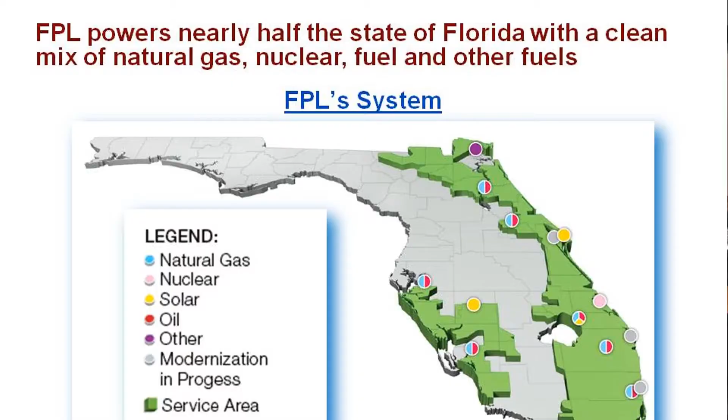As you can see, there's about $62 billion in assets, about 4.6 million customers in the state of Florida. On the NextEra side, we have been predominantly building a lot of wind and taking advantage of the production tax credits, which almost expired this year, but the House and the Senate were able to come together and extend them. On Florida, what you see here is basically we go all the way to Jacksonville—it's about 4.6 million customers, and that's about 52% of the state.

Now, what's misleading is that you'll see oil on some of these. Basically, the only oil that we use—and we have reduced our oil consumption by 98%—is backup oil in the event of a curtailment in natural gas pipelines. It's a 3-day backup supply that we have at each of our natural gas facilities. That's the only oil; we don't use any foreign oil, we've weaned off all foreign oil. If every utility in the United States weaned off foreign oil, the emission reduction in this country would be paramount to nothing you've ever seen before.

You can see some of the solar—we had 3 solar projects that we built. When we talk about modernizations, basically that's taking the existing infrastructure we have in a location. For example, we'll talk about 3 of them: Cape Canaveral, Riviera, and Port Everglades. You take the existing transmission, the existing water, the existing land, and basically modernize—take out the existing technology, put in new technology. So we took those plants from oil to natural gas, and the savings to our customers are unbelievable. Not only that, the heat rate reduction is about 40%, and there's about an 88% reduction in emissions. It's an amazing story—we'll talk about those.

This is NextEra—you can see most of the assets are scattered, actually from Canada all the way to Texas; this is really the wind hub in the United States, where the wind really blows all the time, so you can see where we chase most of our wind assets. Then we've got nuclear plants: Seabrook up in New Hampshire, a nuclear plant in Iowa, and a nuclear plant in Wisconsin. We've diversified a lot into renewables. Most of these states have renewable energy policies we've been able to take advantage of, and in most of them you also have a deregulated utility market where the utilities don't want to be in the generation business, so it allows us to go in—not as a utility, but as a wholesale generator—and sell power. Most recently, we have set up offices in Houston and Austin, Texas, where we are expanding fairly significantly into the natural gas infrastructure, both on the storage and on the transportation side.

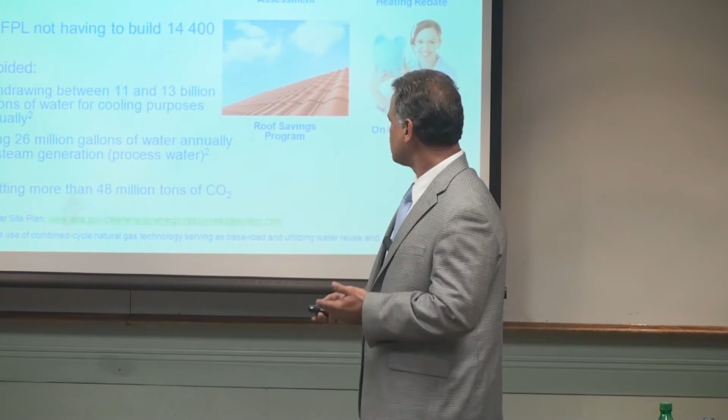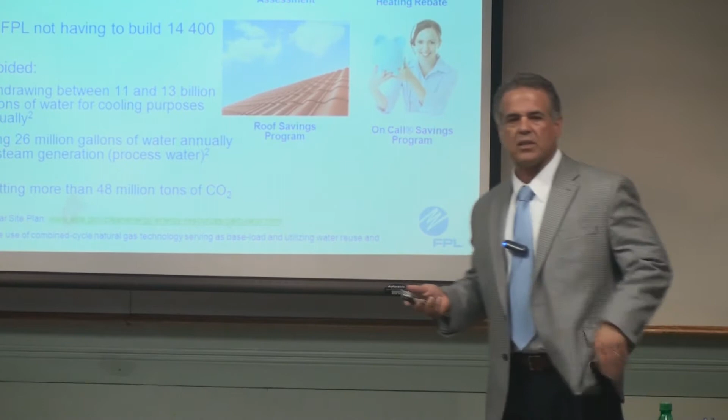We've also got a fairly aggressive energy efficiency program. You can see the megawatt hours, that's a lot of megawatt hours. Basically, that has allowed us to avoid building a number of power plants. So the more we continue to pursue energy efficiency programs with the state and regulators, the more we'll continue to avoid having to invest capital in some of these assets.

Oops, let me see if I can play this. Can I play this, Elena, right here? I'll try to get this video. I don't know, you had the magic earlier.

This is a new campaign. FPL has never been very aggressive when it comes to campaign marketing and being out in the public. We've got a dynamic new president, Eric Silagy, and we've had a lot of new changes at FPL at the top. What we've been doing is beginning to promote our story, and we have a fairly good story. So this is what you're going to be seeing on TV now.

The sun is shining, the energy's high, and here at FPL, we can't wait to get started, because today we get to make a difference. Today we get to help take on the day and make changes for the better. Because for us, it's not about doing what's convenient, it's about doing what's right. A promise that all of us are dedicated to every day. Working around the clock to be there when we're needed just a little, and to be there when we're needed the most. That's why we're reducing our dependence on foreign oil, making the grid stronger and smarter, tearing down inefficient plants, and building cleaner, more efficient ones that run on US-produced natural gas. All to keep bringing you the most reliable energy and the lowest bill in the state. At FPL, we're changing Florida's energy today to create a better tomorrow for all of us. At FPL, we're changing the current.

That's our new thing, changing the current. So it's pretty cool, that's the 30-second version. There's also a 60-second version, so I figured I'd spare you the extra 30 seconds. But we're real proud of what's going on here.

We're growing a lot, but by the same token, through our investments we've been able to keep our costs down as the lowest cost. What's interesting is that, second to, I think, GE, FPL actually had some of the largest capital infusions over the last decade. We've invested over $10 billion while the economy has been in a very poor state.

So it's allowed us to basically tell the story that investing capital in new technology and future technology is what allowed us to keep our costs down. The no-brainer of that is, in this case, for example, we invested a lot in clean natural gas plants, which saves our customers for each plant about $500 million over the life of these assets on an NPV basis.

So we're continuing to invest. We believe in continuing to be aggressive on the investment side. And what makes sense is, as long as we continue to invest in prudent investment, it keeps the cost to our consumers low. Now, we've really been the only company in the state that's been doing these investments. TECO hasn't, Southern hasn't, and now what you're seeing is TECO has issues with their coal plants. They're going to have to eliminate some of this stuff. Progress has issues with coal plants, so they're looking to get into the whole natural gas phenomenon. So we wish them well.

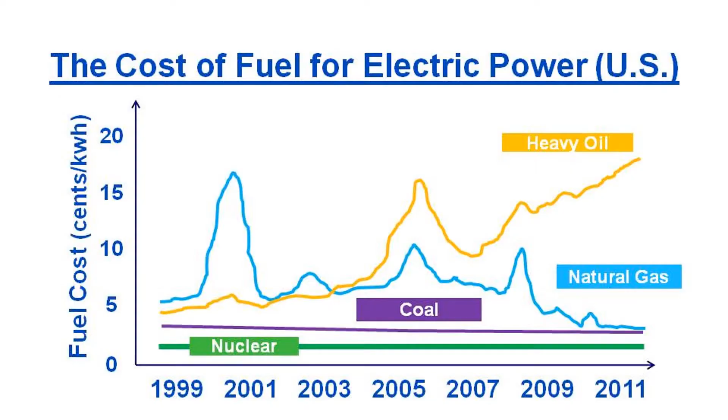So there's a lot of debate about the cost of fuel and what's going on in this country. What's interesting about this graph is that most people, especially the media, give nuclear a very bad name. But when you take a look at the cost of nuclear over the life of a project, this is on a levelized cost of electricity, so you're basically NPVing the cost over 30 years. That factors in the capital investment as well as the fuel. So the beauty of nuclear is, yes, it's a very exhaustive, very expensive process to actually get sited and permitted.

You spend about $150 million just on the application. The federal government charges you $150 million just on the nuclear application. And then it's about a 10-year process to get yourself licensed and ready to go, with a lot of opposition, as we've been facing in South Miami. We've had a lot of issues related to the transmission corridor. But when you look at it purely on the economics, you can see nuclear still makes a lot of sense.

Coal is still cheap. The issue with coal is I don't think you'll see a coal plant sited. If you wanted to get a coal plant sited in Florida, I don't think it would happen, at least in my lifetime, it wouldn't happen. So even though the costs are low for those that are currently generating, I think what you're going to see in coal is, one, a carbon tax that will ultimately come. No doubt it's coming. And I think at some point you're going to see a water tax, because water is going to be the next carbon.

When you have states such as Georgia and Alabama that went through incredible floods and incredible droughts, part of the issue is there's no means to transport water from those heavy drought areas to the areas that are abundant in water. So you're going to start to see more and more emphasis on water. Part of the reason I like that is because it'll allow solar to become a much more natural play for us, and we'll talk a little bit about solar.

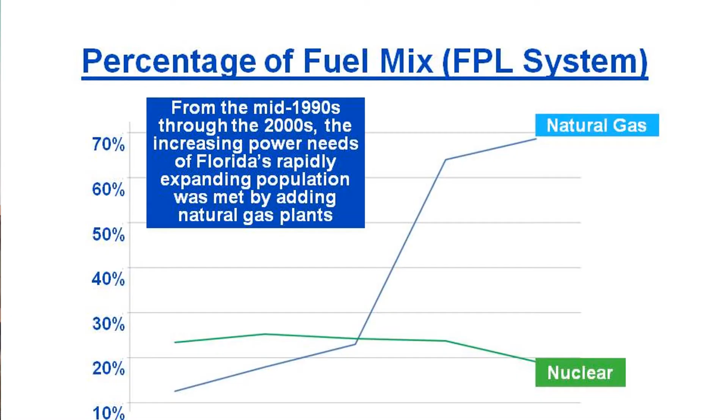Okay, so here's what's going on at FPL. I got great news and some not so great news. The good news is we've been able to keep the rates low. Your rates today are actually lower than they were 10 years ago. And the reason for that is, one, we've been managing our O&M very prudently, but 50% of your bill is also fuel, and we've been able to invest in natural gas assets and convert to natural gas assets. So when you take a look at your bill, you're basically paying about $94.60 for 1,000 kilowatt hours. That's a pretty good deal.

So our commitment is to continue to be able to provide that service to you. That comes because natural gas prices have been basically as low as they are. Had they continued to be $10, $14, your bills would be a lot more expensive, and we'd be looking to do something other than natural gas. So we're about 78% now natural gas in the state. So the good news is it's clean, it's reliable, it's very affordable.

The bad news is you don't want to put all your eggs in one basket. Right now we have two pipelines that feed the whole state of Florida. Both of them come from the Gulf of Mexico. So a bad hurricane, a curtailment, or God forbid a terrorist act, and then the state of Florida is in a brownout, basically rolling brownouts. So we've got about 16% nuclear. We're continuing with our nuclear efforts, but it's a much longer process.

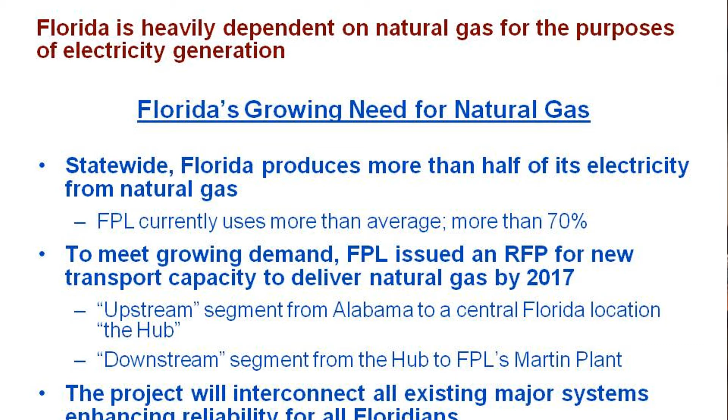So this is what's going on. We have aggressively now been pursuing a 3rd pipeline because our gas needs and the state's gas needs continue to grow. This is a pipeline that would basically originate at what we call Transco 85, which is in Alabama. And that natural gas would flow through the center of the state, not be reliant on the Gulf of Mexico. So basically we're not so much trying to diversify our fuel mix, we're trying to diversify the supply, so the supply in this case is really the assets, the pipeline. And we're pushing hard. Right now we're in the middle of an RFP. We're evaluating, we should be awarding an RFP sometime in June or July.

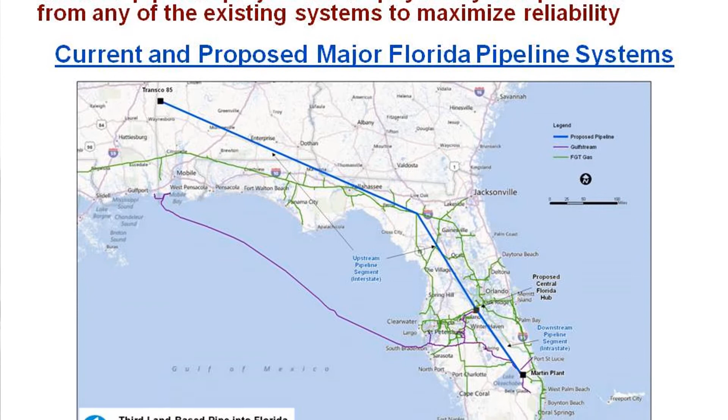And this is where you can see, you see at Transco 85 in Alabama, that blue line would be the pipeline. And it would serve up to a hub in Orlando. Our interest is to basically take that hub from here to here, and anybody else can manage or own the other hub. But it won't just service FPL, it'll service other utilities in the state of Florida. So the beauty of this is it also creates an enormous amount of economic development for the state. It's bazillions of dollars in taxes and obviously a lot of jobs and job creation. So it's a heck of an economic development play also.

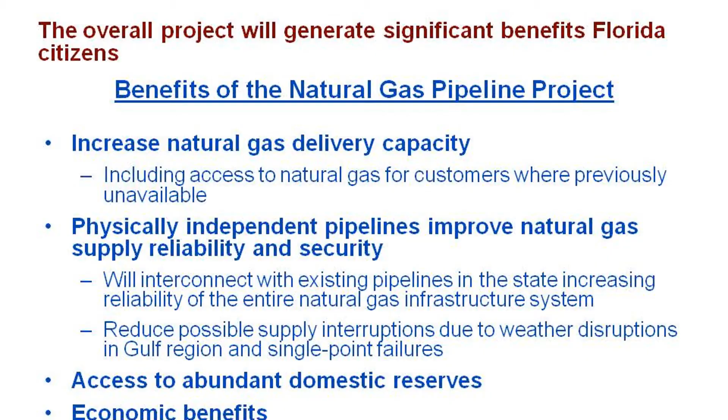So I think we've covered some of this, but obviously the benefit here is the more you can increase natural supply. Florida doesn't have indigenous natural gas, coal, or oil. The only thing we really have here is the sun. So we are constantly paying other states to supply us. We are the largest purchaser and consumer of natural gas in the United States. We, FPL, not NextEra, purchase about $5 billion every year of natural gas, and not one penny stays in the state of Florida. It all goes to Texas, and Rick Perry's very happy. It goes to Louisiana.

Bobby Jindal's very happy too. We just had Rick Perry here with Rick Scott, jostling back and forth on the economics. Texas has the number 1 economy, and Florida has now moved up to the number 3 economy. So when the media tells you all the bad things about Florida, let me tell you, Florida is actually doing very well. Our 4th graders here just ranked number 1 in the United States, and number 2 in the world, second to Finland. So there's a lot of very positive things happening here on the economic side.

Florida is open for business now. We've got a tremendous story on unemployment. When the governor took office, it was about 12.4% unemployment. We're down to 7.6%. It's a great story, and we're continuing to grow. I think we're going to see continued growth because, at the end of the day, who doesn't want to be in paradise? Would you rather be in Texas, where it's hot or cold or hot? Or you want to be in Florida? You've got beaches, you've got sunshine, and you've got the U.

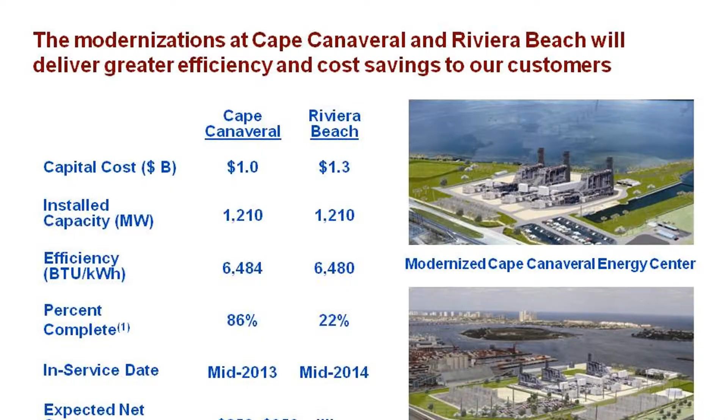That hurts me to say that, but we used to play against the U a lot.

So these are the modernizations. This is what these natural gas plants look like.

But here's, you remember those big old stacks you see on the highways, 350-foot stacks? Some people hate them, most people hate them, some people like them. Well anyway, at Cape Canaveral we blew up the old plant a couple years ago. We actually demolished the plant, and this new plant is going commercial now. I think in June of 2013, Cape Canaveral will be going commercial. The beauty of that is we spent $1 billion for 1,210 megawatts. That's less than $1 a watt.

That's phenomenal. When you look at solar today, residential solar is going for about $6 a watt. Utility scale solar is going for about $2.50 a watt. For that $2.50 a watt, you get 20% capacity, meaning you get sun and energy for 20% of the time. When you do it on a natural gas plant, it's 90 to 100% of the time. That's the difference between the two, and that's why the levelized cost of electricity is a lot lower with gas.

Now, when you look at the efficiencies, for all the engineers in the room, these old plants were about 10,000 heat rates that we replaced with about 6,400 heat rates. What that means is you're burning about 33% less gas in this case, which is about a $500 to $700 million savings over the life of the asset to your customers. So when you take these two together, it's over $1 billion in savings. That's what allows us to keep our costs down.

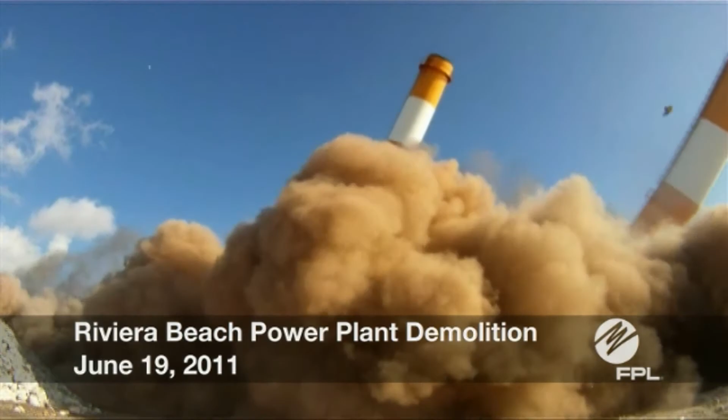That took a year of planning. We blew it up in 7 seconds. For 1 year, we had every structural engineer and civil engineer looking at these assets. Keep in mind, there's $1 billion worth of transmission at these sites. You've got Intracoastal, port authorities, Coast Guard, Homeland Security. We had to coordinate with a ton of people.

When we did Riviera, because it was right on the Intracoastal, it was really neat. I got to play media boy that day. So at 5:30 in the morning on Father's Day, we were at the top of the Port of Palm Beach building, looking down. It was pitch black, but that's FPL. We were there very early. The boom was going to be at 8:30 in the morning.

At 6:30, I could look at Peanut Island across, and people were camping in their tents, just waking up. The media got there about 6, and every 5 minutes they would ask, what's going on now? Nothing. There's nothing going on now, right? This went on for about 2.5 hours till we actually blew up the thing. When you looked on the Intracoastal, there were over 1,000 boats all over, taking a look at this. And it's all over YouTube.

It's really cool. But with the beauty of it, we got to blow up 2 of these in 1 year. The week before we blew up Riviera, there was a horrific accident up in Ohio where they were blowing up something, and it started to come back. You see all these little kids, school buses, everybody running away from the video. So this went up to our top management. We're 1 week away, but they finally decided, okay, let's have confidence, and thank God everything went right.

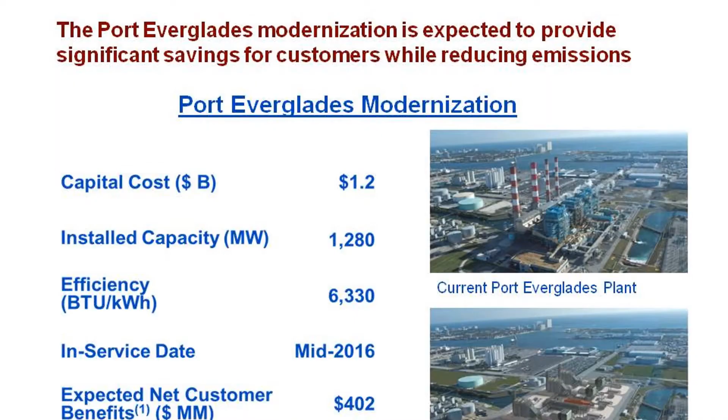Come this July, we're going to do this at Port Everglades. A little more challenging because Port Everglades has 4 stacks, and if you see these 2 stacks here, they're significantly thicker than the other 2. Now, Port Everglades has an airport, a port, everything you can imagine. So it's going to be a little challenging, but we're pretty confident.

Now, what's amazing about this too is look at this heat rate. From the 6440, which was unprecedented, now it's going to be down to 6330. These are Siemens technology, Siemens turbines, a German company. So the beauty of this is continuing to get better and better. The good news for us as consumers is that it also makes our electricity price even cheaper.

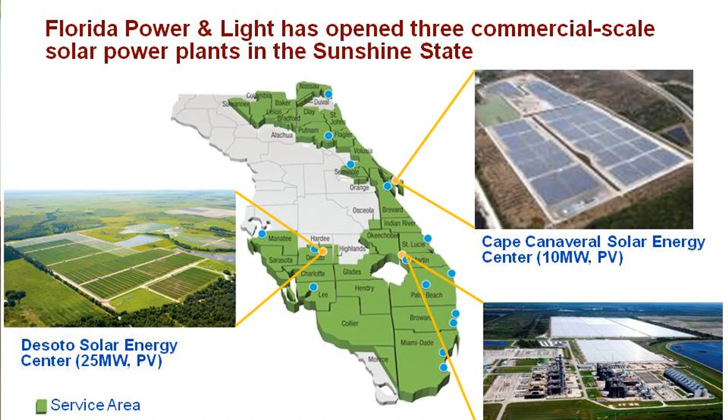So here's our 3 solar projects. Keep in mind, we built this in 2008. There was legislation that basically allowed 110 megawatts to be built in Florida, first come, first serve. We were the first company able to secure transmission, get the zoning, and get the permits. We ran out there and were able to apply for all 3 projects. We were able to be first come, first serve, so we decided to try different technologies in different locations.

At the time we did DeSoto, it was 25 megawatts, the largest PV facility in the nation, and it was $6 a watt, very expensive. But it gave us the ability to learn how solar would behave in Florida with all the intermittency, with all the cloud coverage. DeSoto is actually outperforming all of our estimates. We projected about a 23.2% capacity factor, and we're at about 24. That means 2 things.

One is you're getting more sun, irradiance per square foot, or you're getting more efficiency out of your machinery. So we track both, and it's doing very well. The beauty of DeSoto is that we have 13,000 acres, so we can scale this plant to 300 megawatts, which would be phenomenal, right? It'd be phenomenal.

And then we also did a public-private partnership with NASA. This was a really cool project because it was on federal land, at the Cape, at the Kennedy Space Center. So when we went to lease their land, typically we're not very good at leasing land. We like to buy and own everything. But in this case, we wanted to work with NASA, with rocket scientists.

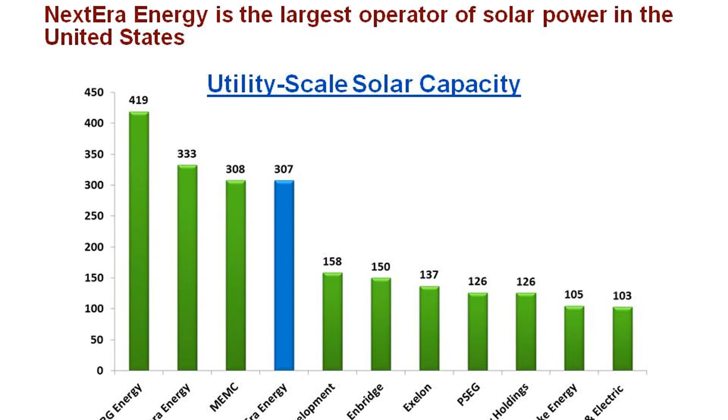But this was truly innovation, the first of its kind. The only change is that when we built this plant, solar thermal was actually cheaper than PV. Today, PV is a lot cheaper than thermal, obviously because of scale. Right now we own about 307 megawatts of solar, but we've got over 500 megawatts in development in California, Arizona, Nevada, and Texas.

So we will quickly jump over NRG in this project.

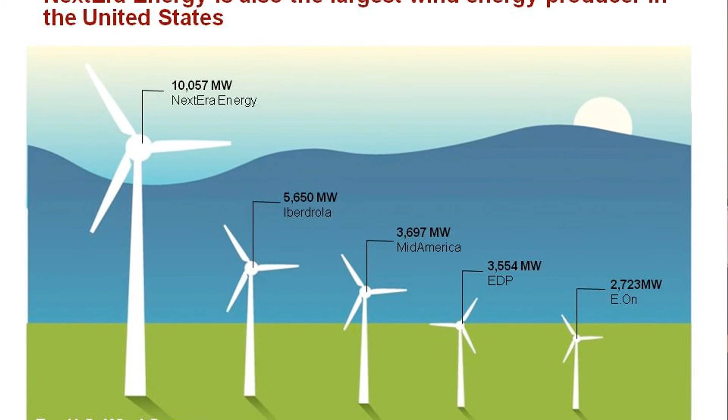Okay, and this is, we just had an incredible milestone. We have just put in over 10,000 megawatts of wind. That's incredible — most utilities don't even have 10,000 megawatts of anything, and this is 10,000 megawatts of wind alone. That's like a large utility on its own. At FPL, for example, we have 24,000 megawatts, and on any given day we're the third largest utility in the country.

So with 10,000 megawatts of wind, you can see the second is Iberdrola, a Spanish company, and they're doing a lot of stuff here, but they also did a lot in Spain. If you travel in Spain on the train system, you can see a lot of wind turbines all through the hills and mountains. Most of our wind is from Texas all the way to Canada. We're real proud of that accomplishment.

Right now you see something called FIT, a feed-in tariff. What happened is the government put in a plan that basically says for every megawatt of renewable energy, you'll be compensated at X, which in this case was like 20 cents. So if the cost of electricity is 10 cents, but you put in renewable at 20, they'll pay you the 20 cents. It's a government subsidy program, so it allows us to aggressively take advantage, and we're building all over Canada right now. We also built a solar thermal project in Spain, but it's not like the one in Martin — these are not connected to a gas plant.

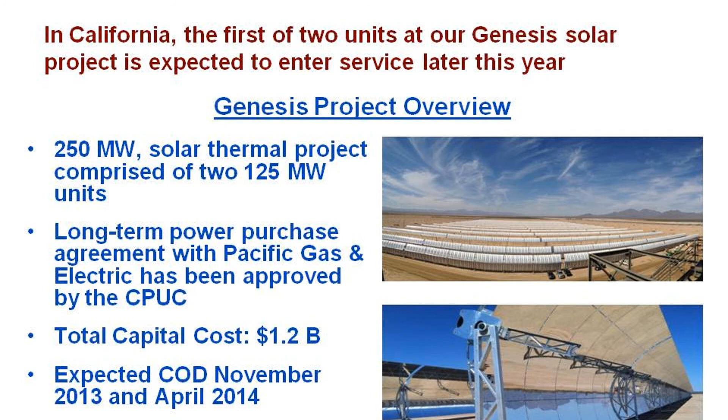These are standalone solar thermal projects, and this is the one we're building out in the desert. These are going to be monsters—250 megawatts of solar out in the desert.

These are going to be the solar thermal plants, and what they do is they actually track the sun. So these mirrors throughout the day basically chase the sun, and these get about 30% capacity out in the desert.

Nuclear, we're proud of our nuclear. I know nuclear gets a bad rap in the industry. There hasn't been a nuclear plant built in the United States since 1976, I think. But candidly, the nuclear plants run very well—it's part of the reason we've been able to keep our costs as low as they are.

The typical bill in the United States is about $128 a month, and we're at $94. The #1 area, Washington, that's predominantly hydro, and those were built in the 30s. When they built the hydro plants in the 30s, it was an absolute rebellion because people said it was too expensive.

It was, and the utilities were under attack, similar to what you're hearing about solar today. So solar today, I could build you a solar plant for about $1.50 to $1.60 a watt. That's pretty phenomenal because you'll never have to use fuel again. For $1.60 you built it, the levelized cost will probably be about 11-12 cents, but you never have to use any fuel.

So what happens is solar is only going to be as good as the cost of natural gas. Today it might seem a little higher, but it's a hedge. And when do you want to hedge? You want to hedge when natural gas prices are the lowest, because it's only going to go this way.

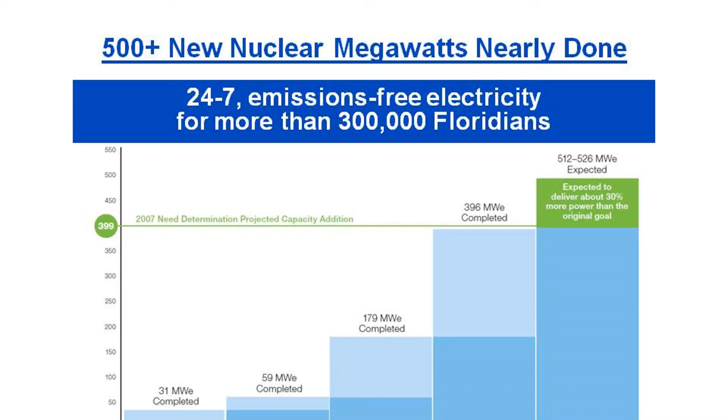So on nuclear, where we're at now is we just spent about $3 billion on what we call uprating. We added about 250 megawatts to both our Turkey Point and our St. Lucie facility, and those went on schedule, on budget. They're doing phenomenally well—the fuel savings alone in one month against a fossil plant is about $10 million. That's what you'd be spending on fuel without a nuclear plant.

We're planning for the future where there's no real timeline—I think the key for us is to get the license. Once you get the license, you can monetize the license. But it does take, it's about a 10-year process once you get the license to get a nuclear plant built.

So you've got a couple companies that are looking—one Southern company is building the next generation of nuclear, and you've got some other entities playing with it. But I think the issue is, if you're a CEO of a company and your company's market cap is $20 billion, round number, it's going to cost you $18 billion to build a nuclear plant.

It's going to cost you $1 billion to build a natural gas plant. Are you going to bet the company or not? That's the debate going on with each CFO in the country. So even though nuclear is a great bet for the future, are you willing to bet the farm on the first one? That's the challenge every CFO faces—it's not a technical decision, it's an economic decision.

So that's our challenge. And from an economic development standpoint, we just had 4,000 people working at St. Lucie on the uprate, and a similar number at Turkey Point, right Ramon? We had around 4,000 people working on it. So in a time when you hear all these terrible stories about the economy and people unemployed, we're doing our best to keep people employed.